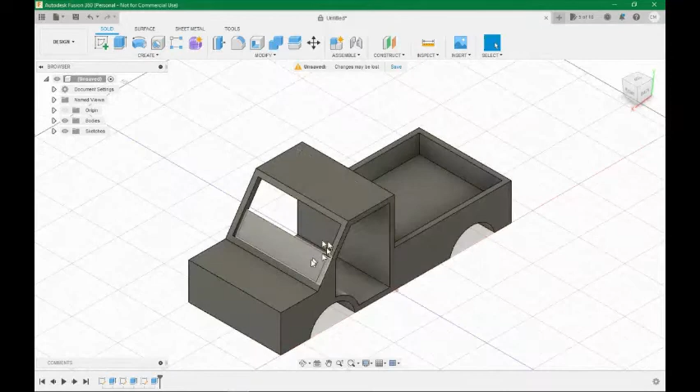First on our list to do is the axles. Come to either side, it doesn't matter which one you want to draw your wheels on. Come to create a sketch, come to the side plane. It doesn't matter which side of the vehicle you do it on, this face or the other face. The only reason I'm using this face is because that's where the original plane was.

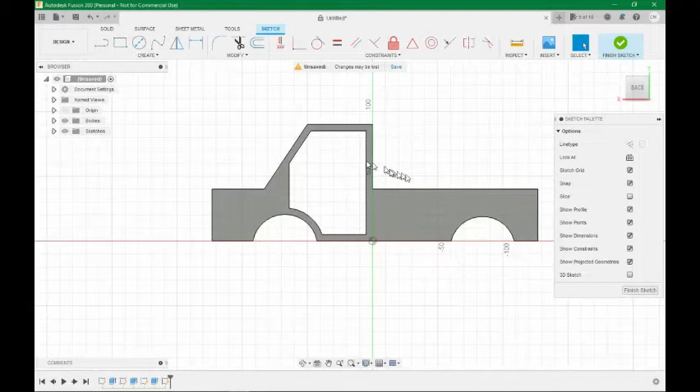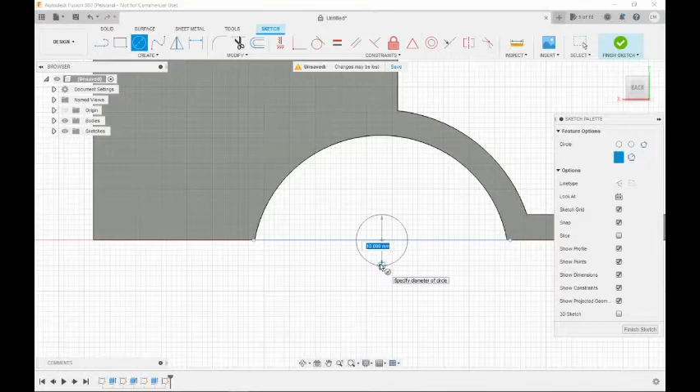So you want to find whereabouts the center point for this wheel arch is, then come to your center point circle, keyboard shortcut C, and go to wherever the triangle is. Because our wheels are 50mm, slightly lower, I'm going to drop it. I'll put ours at 40, so it's only just hitting the wheel guard, so I'll drop it to 35. You adjust it to whatever wheel size you made your wheels.

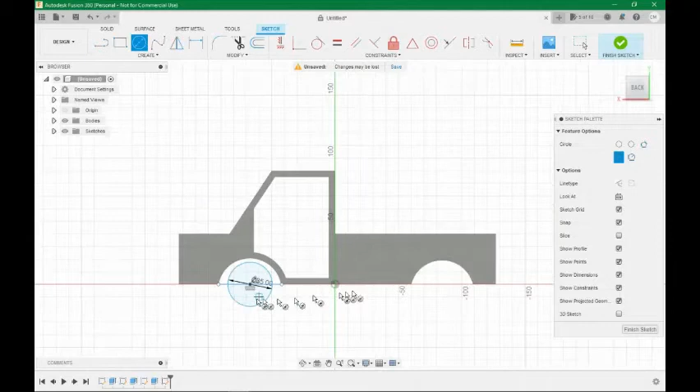Click, then come over here and do the exact same thing. Line, keyboard shortcut L, drag your line all the way across, center point circle, find the center, and set it to 35. Unless you want to make it a hot rod, I'd do the same sized wheels on each one. Then come over here to the line and delete it.

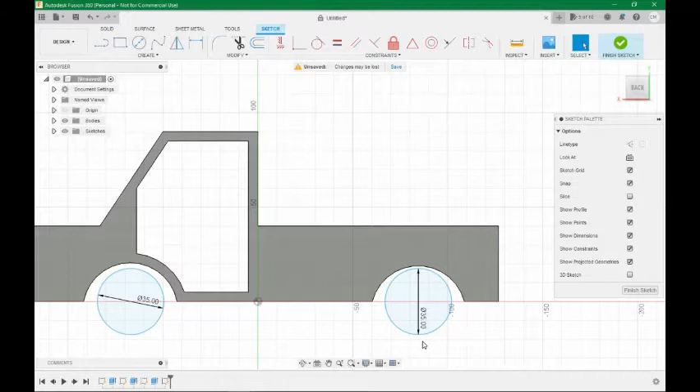So there are our wheels, but we don't just want our wheels. Now we want to get our axles - the bars that go between the wheels, that's it. Currently escaped my mind for a minute there.

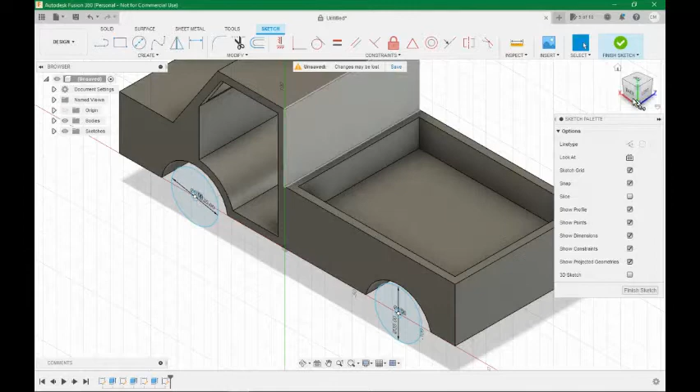I'm going to have 5mm axles - not axes, every time I say axes just imagine axles, okay, that's going to make my life and your life so much easier. Alright, so there you go, there are our axles. Now we can delete these circles, they were more just temporary.

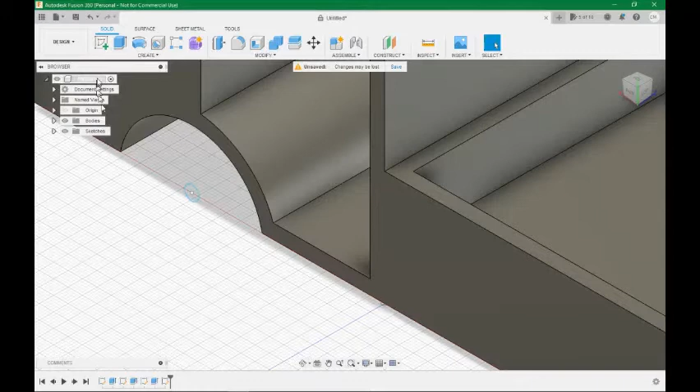Then go finish sketch. With those 35mm earlier for our actual wheels, remember that number because it's going to come in handy later in the video. Now come here and press E for extrude, click both of our holes and go all the way through. We made our vehicle 100mm wide, so our axles have to be 100mm long as well.

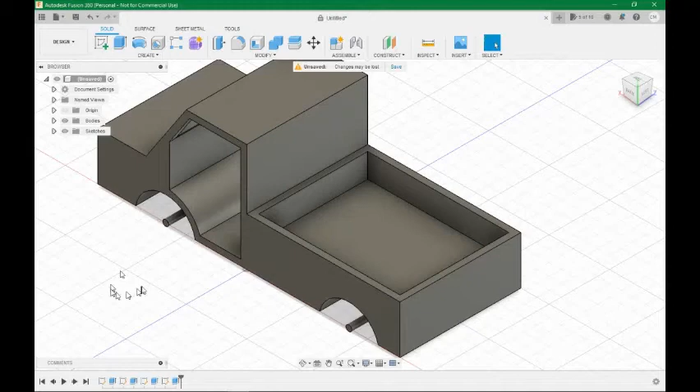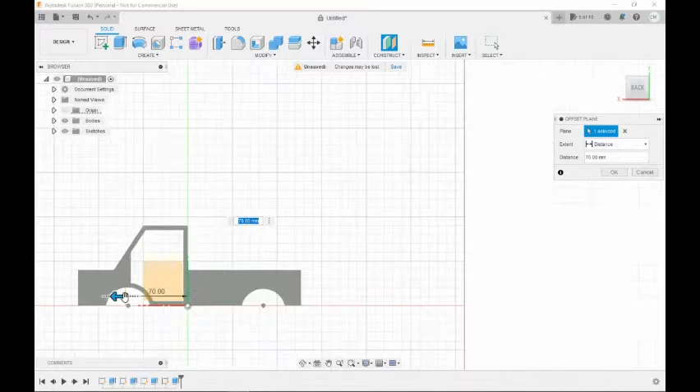Now is a slightly trickier part - what we want to do now is the actual wheels. Come here to offset plane, click this, but you don't want the side plane. We actually want to hide our body and come here to this side plane, then re-show our body and take it. If you come here you'll see it's only just in the middle of our wheel, like just there. Go tick.

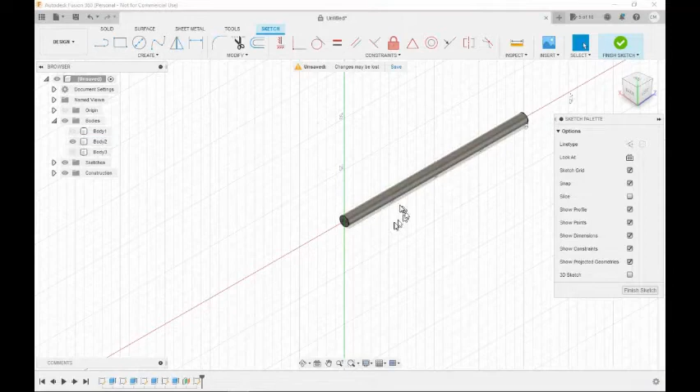Come over here to where you can get a good view of it, click that and go sketch. Now come over here to bodies, you want to hide body 1 and body 2 - if I am correct, no, you want to hide body 1 and body 3, whichever one gives you that axle we made the plane on. Come to this view.

Now this is where life can get easy or complicated, whatever you like your wheels to be. Going from the center point in our axle, we want to make this 30mm, enter. Then you want to come with another line, go out about 10mm, about to there. Escape. Then come up here to this fit point spline, squiggly line, whatever the technical name for it is. So we know we're currently at 30mm.

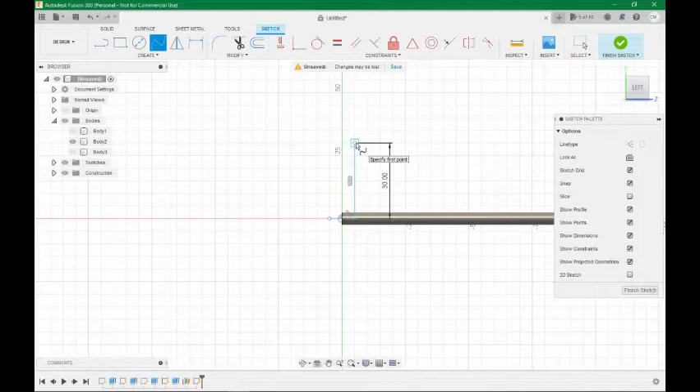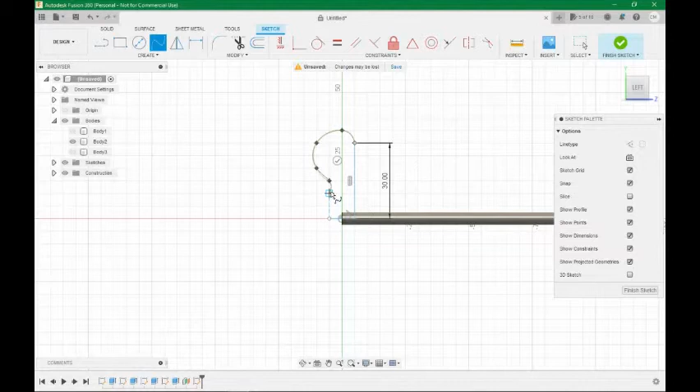If we go up another 5mm, which I believe is up to 35 mil there, that is our max limit. So we want to drag our wheel out, so up, and then out a bit more. This is the fun part - this is where you get to kind of make your own customized wheel. I'm going for a really wacky design like that.

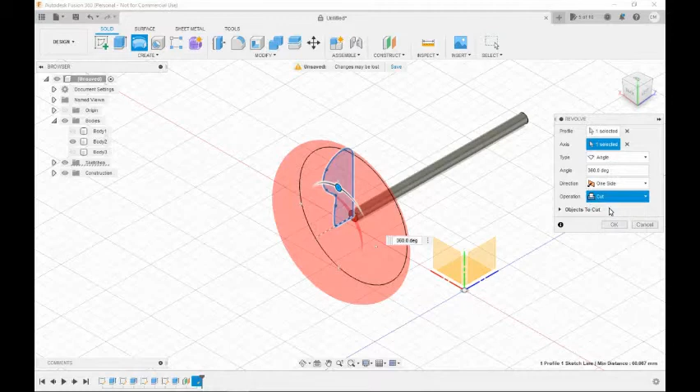Then go finish sketch. Click this, go revolve, and then click this bottom one here, which is going to give you a full revolve. But instead of it being cut, you want to come over here - instead of it being cut, make it a join. And make sure that it then fits within the actual body. So see how that's too tall?

I figured out where my mistake is. My mistake was that I was thinking it was 35 mil straight up, but we actually want to halve that. So we want to cancel, and come back here to this sketch.

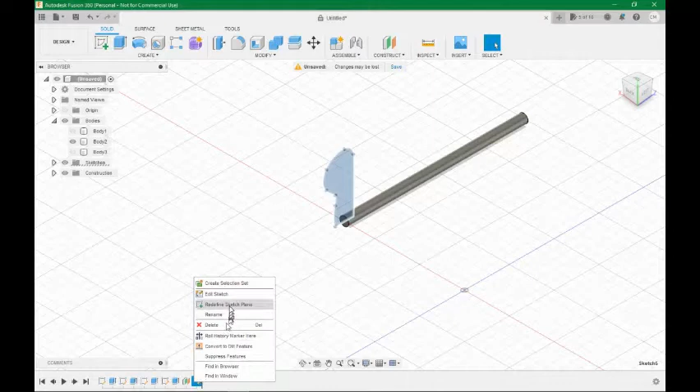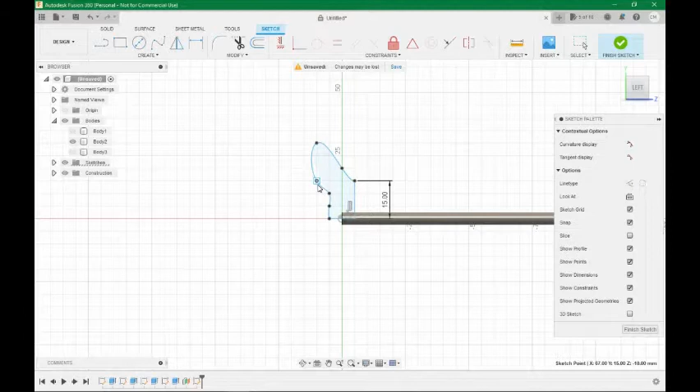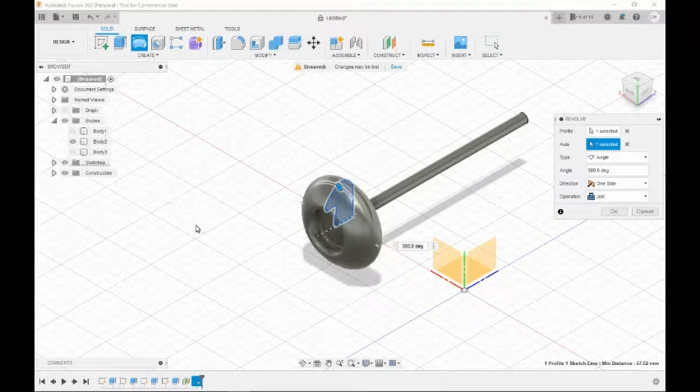Click there, do revolve again, like that. As once before, you go join, like that, and that gives us - I like that wheel. That wheel is incredibly wacky. Then make our body visible. See how it just fits in? That only just fits in, that's almost perfect. So there you go, that is our revolve.

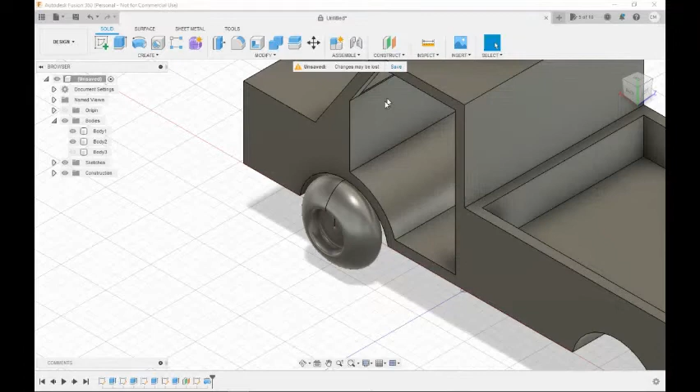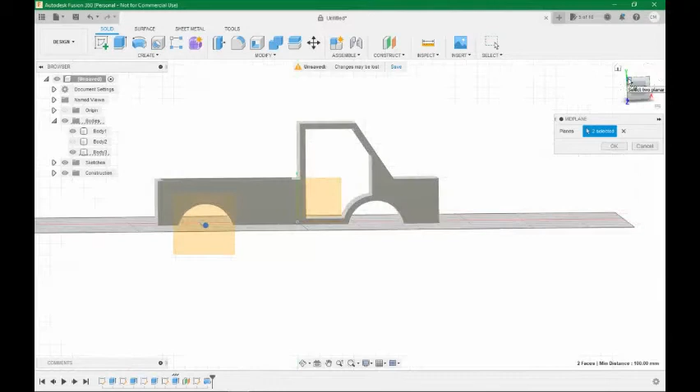Now what we want to do is another offset plane, but this time a midpoint plane. We want to hide our body 2, but make our body 3 visible. Come over here to the back view, click this point here, and then come all the way to the other side, and click this one here, and that should give us a plane directly in the center. So now we can go hit OK.

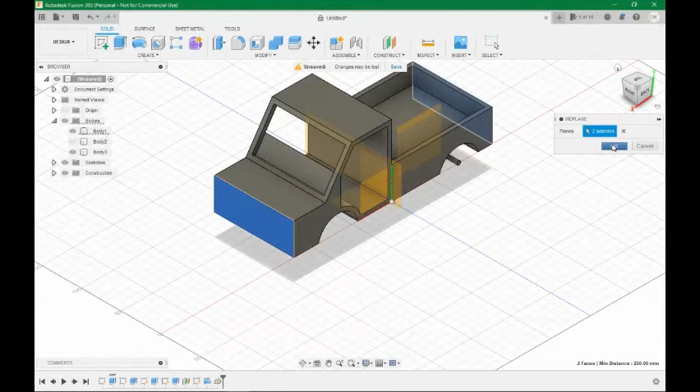Now we also want to create another midpoint plane. Come here, go midpoint plane from here to here. Because we know that they're roughly the same, that's going to put another midpoint plane about in the center there, which is roughly where we've already got that original plane, but it's not. So therefore, hit OK. Now you want to make this body visible again.

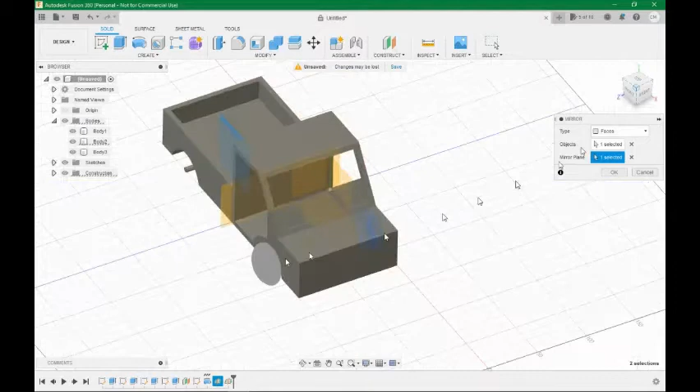You now want to come over here to create, come all the way down to mirror, and mirror this object by mirror plane, using this plane, and that is going to mirror our exact object on the other side. So now if we hit tick, that should have just worked.

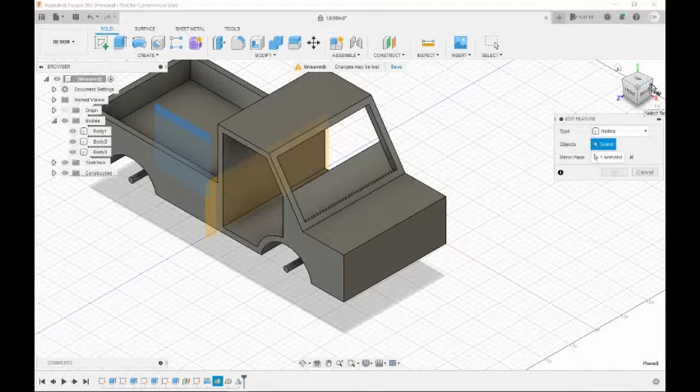I am confused. Alright, I'm going to come back here to edit feature. Oh okay, I know my problem - I've done faces. You need to come over here to bodies. You then want to click this whole body. That was my issue. And there you go, now you've got your wheel on either side.

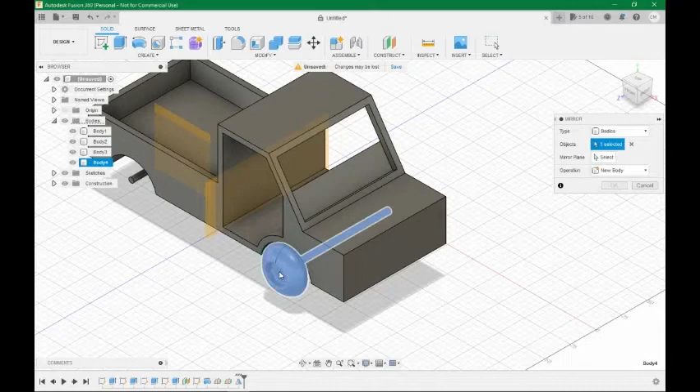Now what you want to do is come over here and do another mirror. Click bodies again, click this one and this one. Then you want to select the mirror plane, which is this one - put it about there. And that's okay, and you want to make sure it has to be a new body, this one.

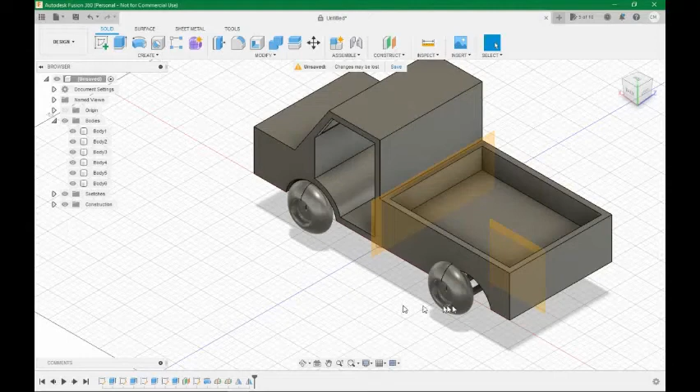Hit OK. Now what you do is come over here and go M for move. You have to click this body and then come all the way to the back and click this body. Then all you have to do is move it straight back. No, sorry, Control Z.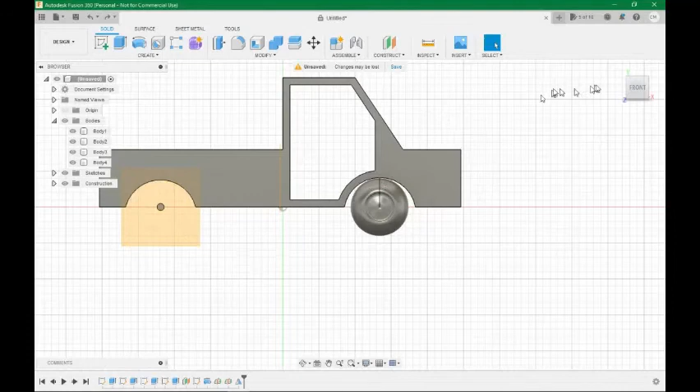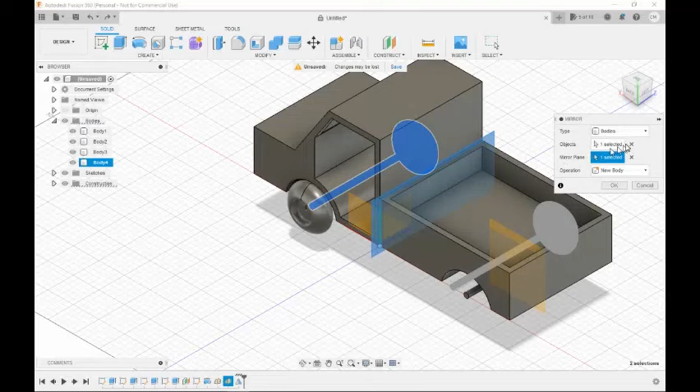So what we can do is just right click, go - don't worry, we've got to do that mirror again. Alright, in my old one, I've just had an update on Fusion, so it must have changed.

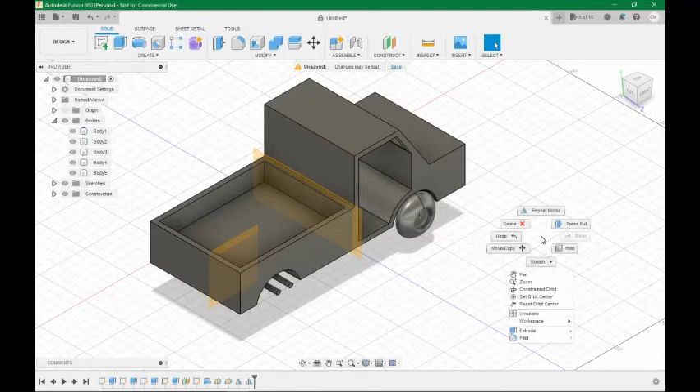Should be repeat mirror. Want this body this time, same mirror plane. Go OK. Then you want to come here and go M.

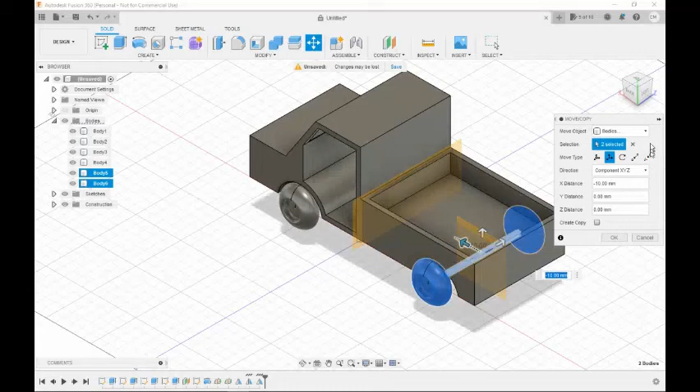You want this body and this body. Then you want to click over here to this one and move it straight back till you're in line with that other one. So the best way to do this is come to the bottom and then adjust this to whatever - zoom in and adjust it so you've got the same distance here, and you can just eyeball it, or the blue is completely covering it.

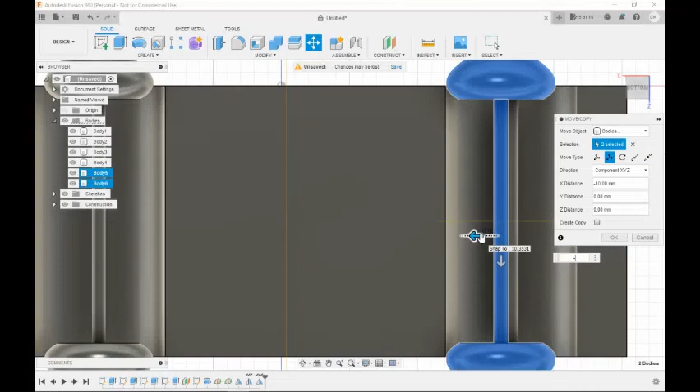So we can see that this is just jumping from 10 to 15. I'm going to go minus 14. See, yep, oh that's perfect - that landed directly on the dot. That's where we wanted it. And that is our wheels done. They look really wacky and weird and certain things like that, but they are our wheels done.

I might have to turn this video part series into 4 videos because I am already at the 10-minute mark, which is how I like my videos at.